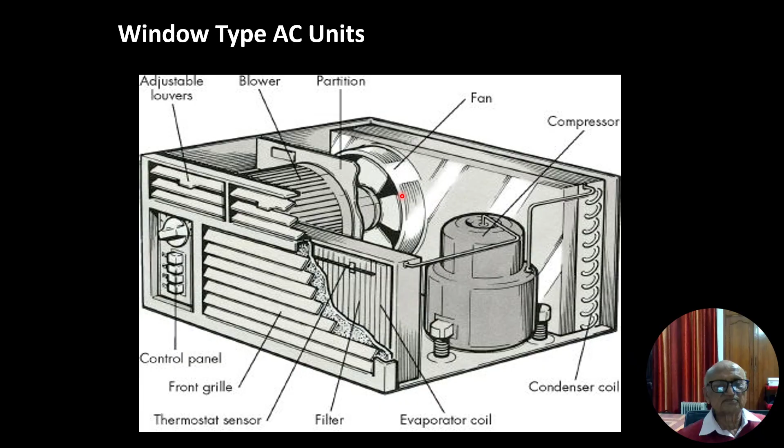Friends, in both the cases, that is window and split AC system, we have six units component. The first one is compressor, for increasing the energy in the system by way of compressing and increasing the pressure and temperature both. Second one is the expansion valve, which is just opposite of compressor, where the pressure is reduced.

Then a hot coil on the outside. In case of window, it is mounted external. A chilled coil or evaporator coil, which is mounted inside. There are two fans, one fan for circulating air inside and another fan for cooling the condensing unit, both mounted on the same shaft. And of course, a control unit has to be there.

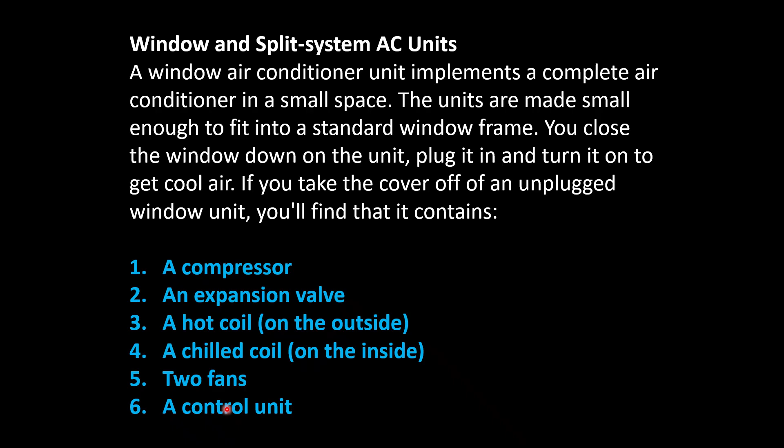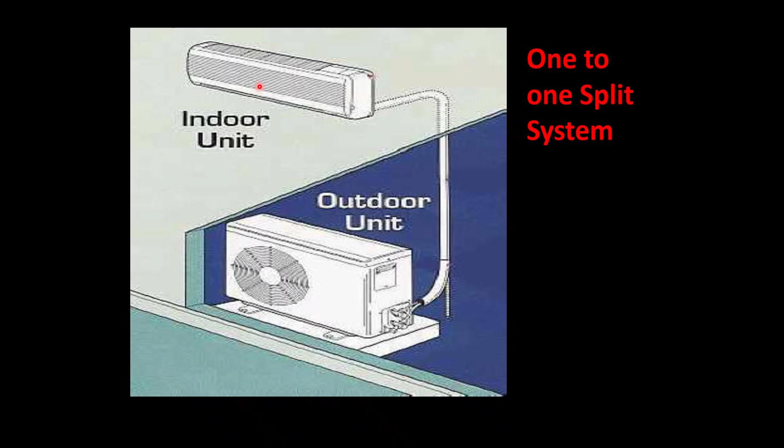Friends, we have two types of split systems. The first one is one-to-one, in which case there is only one indoor unit connected with one outdoor unit. But there is another system which is known as one-to-many split systems, in which case there is only one outdoor unit connected to a number of inside split units.

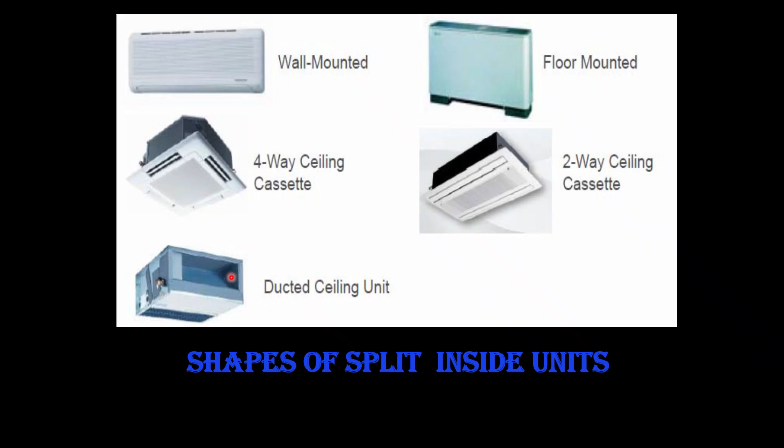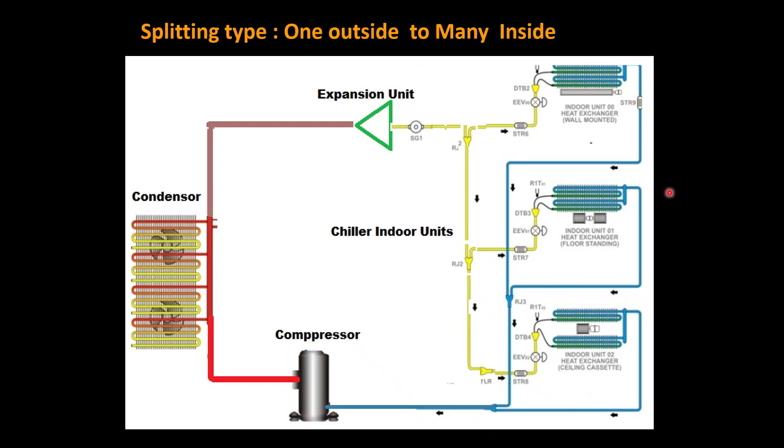This is the detailed diagram of one to many split unit. In this case, there is one condensing unit, there is one compressor and one expansion unit. But indoor units are split to many, one, two, three here. So this is one outside unit to many inside unit type of system.

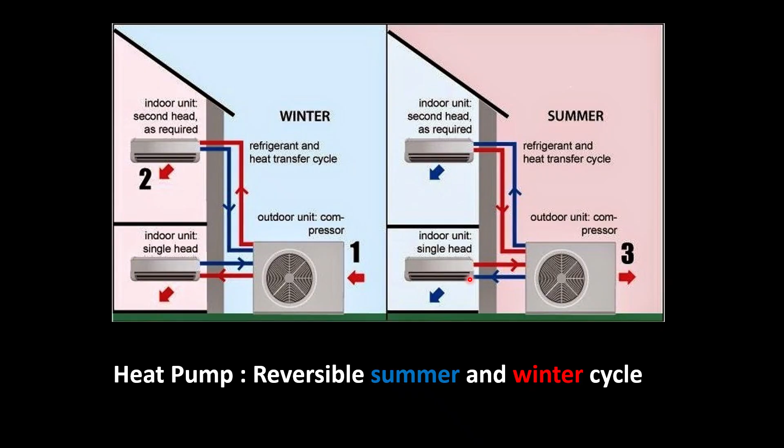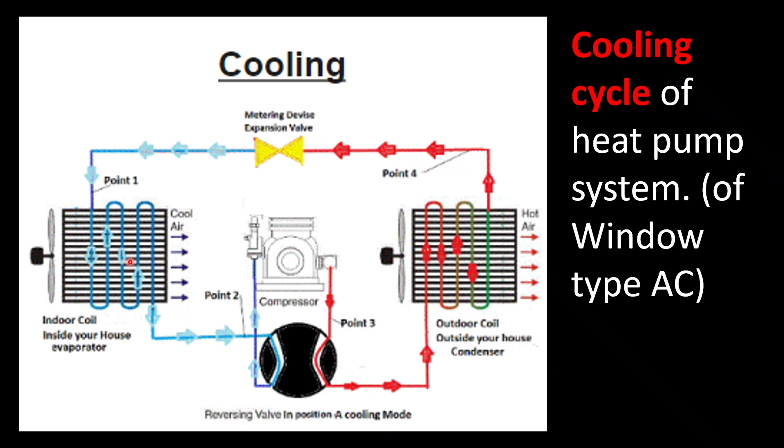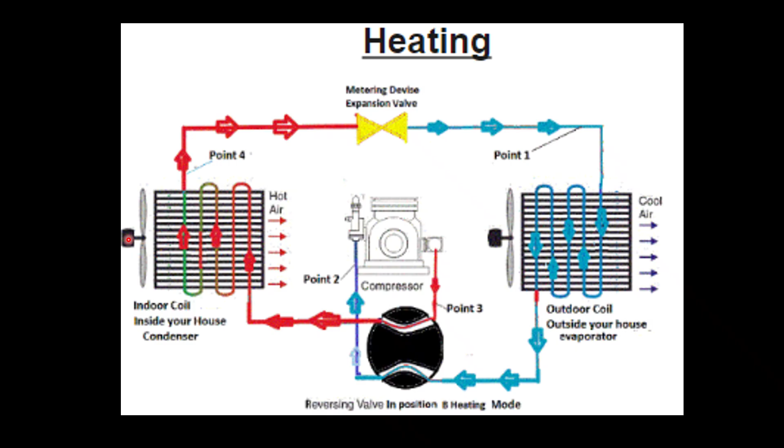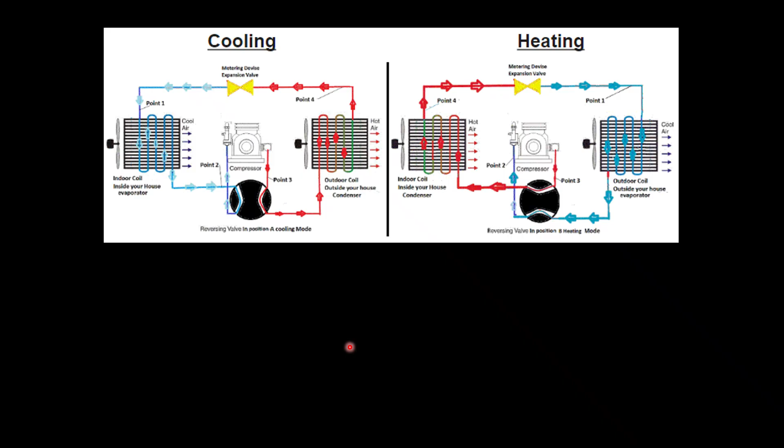Thus, the same thing shown during winter heating cycle. The operation is reversed through the reversing valve. So from compressor you are coming to indoor coil, where air is getting circulated through blower fan, and then after having expansion it comes to outdoor coil. Friends, in this diagram both the operations are shown, operations of the heat pump in cooling mode and heating mode.

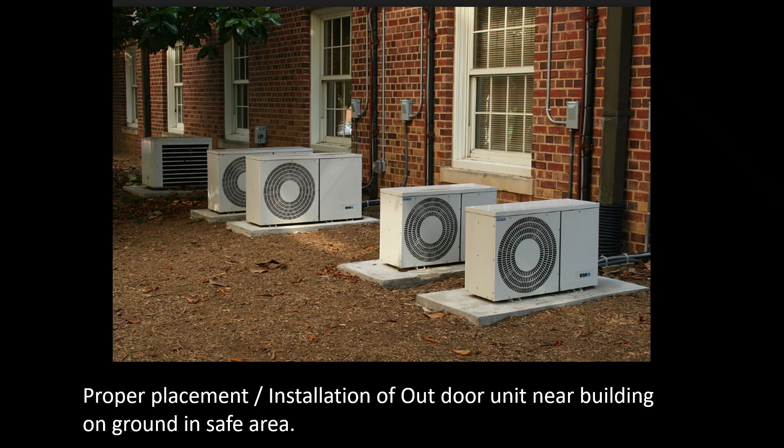Friends, in the campus or residential unit which is safe, the outdoor split units are placed just on the ground, but on foundation, keeping in view that flood water does not come here, and this outdoor coil getting power as well as the refrigerant through one pipe. Friends, this shows the installation of an outdoor unit on the roof. Roof may be on just first floor.

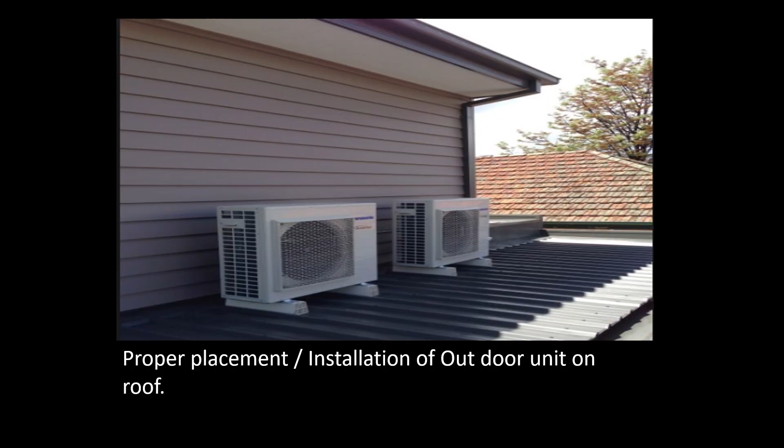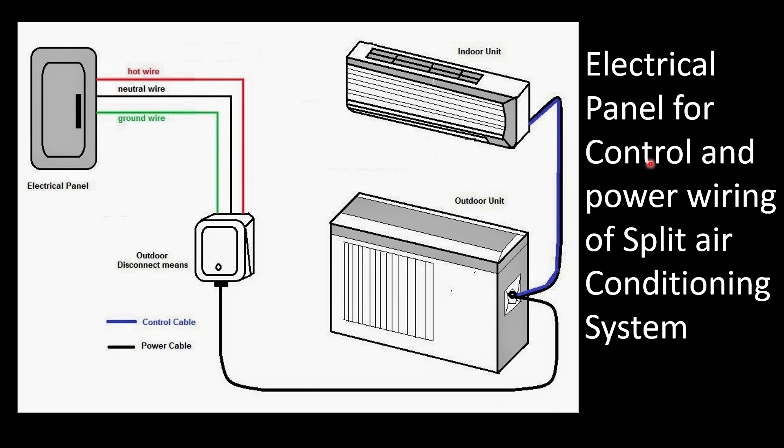Friends, this shows the electrical wiring through electrical panel for control and power wiring of a split air conditioning system. Friend, this is isometric schematic in which one outdoor air-cooled type condensing unit is shown, which is connected to a number of internal cassette type evaporator units.

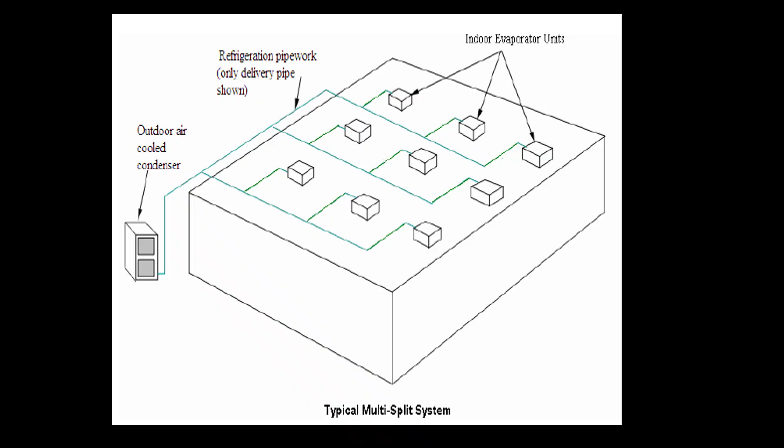Friends, this is a diagram which shows the connection between outdoor unit and several indoor units of different type, although here they have shown only cassette type indoor units. You need to have a remote controller, wired type indoor controller, wired remote controller, and central remote controller through PC.